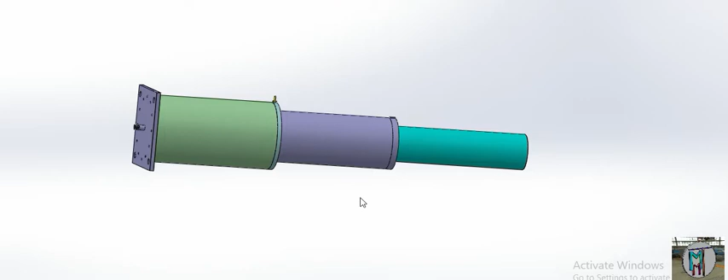So what is the working of that? Suppose we can close this now. This is the cylinder, suppose this is 500 mm, and we want the stroke of this cylinder. We have to move our part around 900 mm.

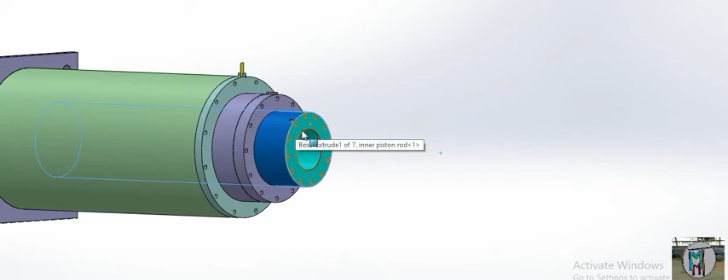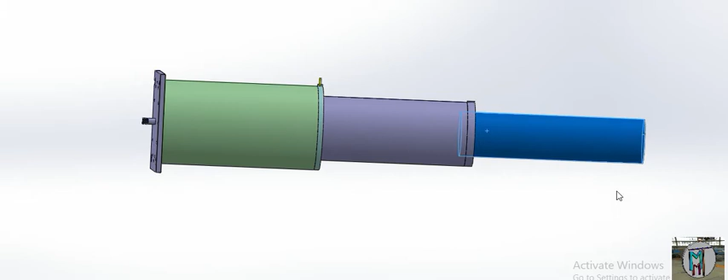So that time we have to fix our parts here in this portion. You know very well about this: this is the A point and this is the B point. When pressure will come from this point, the shaft will move forward side, it will go forward, and again it will go forward. How will it work? We will tell you here.

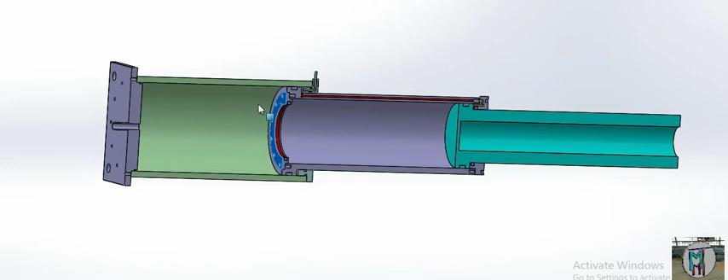This is the section view of our cylinder, the same cylinder. Forget this one first, we have to check this. Pressure will come here and pressurize this portion of your piston. It will be moved forward and backward side. Pressure will enter here and drain through this. This is the B point.

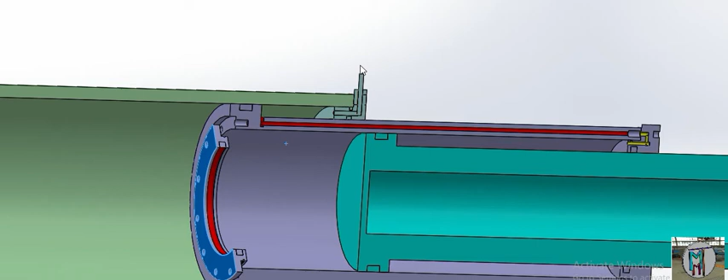So pressure will come here when oil is here. New oil will enter and the old oil in our cylinder will go through this to our tank, through the valve and to the tank. So that is the function of this, and we have to move this now.

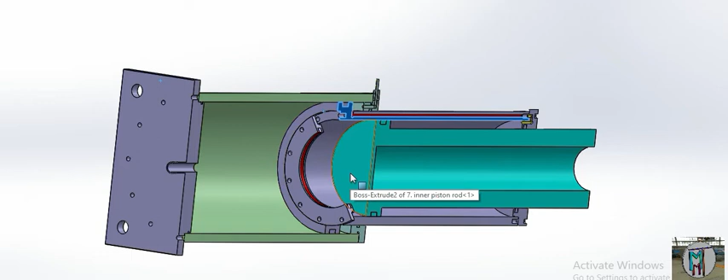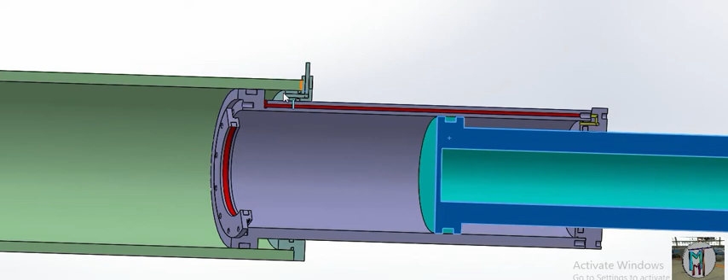So you can see the one hole here, and when pressure comes, this portion will be pressurized and also this portion will be pressurized. So we pressurize this, it will move forward. The oil we have fixed here, you can see the point, and through the pipe of this cylinder body it will go through this one also. So pressure will come here.

So this will go forward and also this will go forward. This oil goes through this, and what oil is here will go through this point, and also go here.

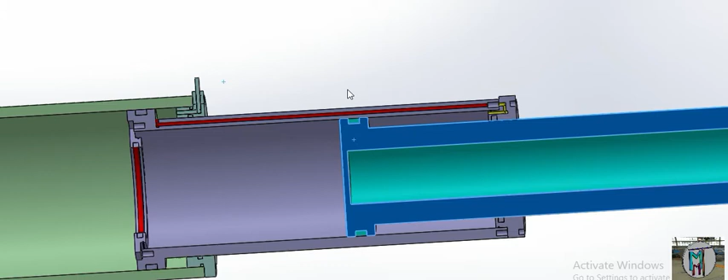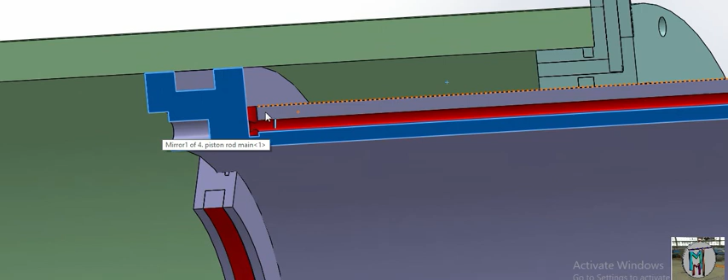And when we want to close this cylinder, pressure will enter. Suppose this is the B point, so pressure enters through this, pressurizing this portion here. When pressure comes, it will go here, and you can see one hole inside here, this red point I colored. Pressure enters through this, comes here also, and releasing through this same way, it will go inside, also due to this pressure. So when it goes, your system will be closed, and the part you want to move will be moved.

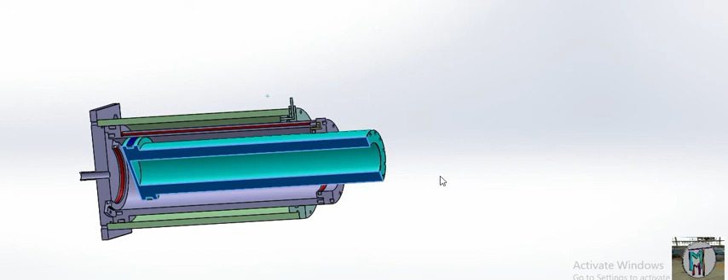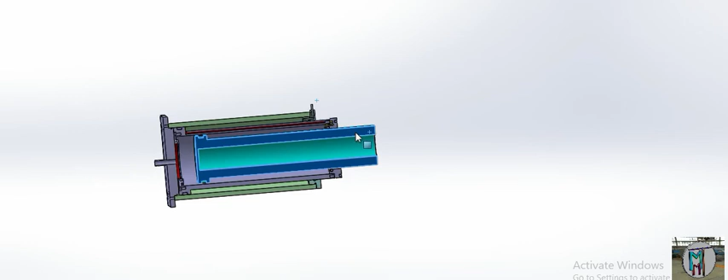Suppose we use this cylinder in our machine only, where we have little bit of space. If we compare to a crane, you can see the control of this length also. If you want to move this part, it will be moved. How will it be moved?

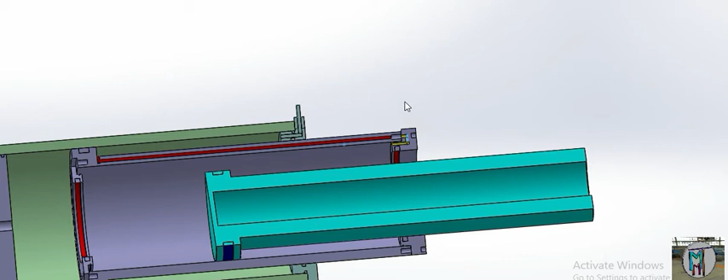Suppose we have taken this through this hole, so no need now, we will take directly from here. We will close this, we will take one outlet from here. Suppose now we have to fix two valves, one valve for this and one valve for this. When we want to move this only, not this, this will be closed. This valve will be closed here, and when we want to move this part, we can close this valve so pressure will not release from here.

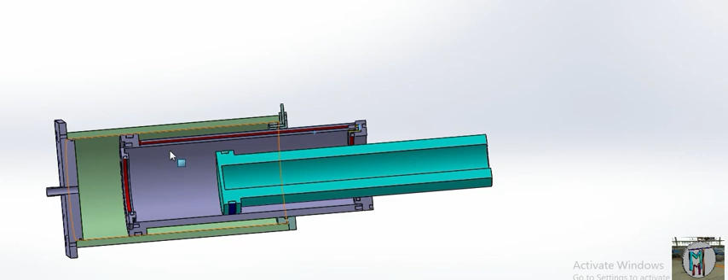Suppose we will set the position now first, both are closed now. Now we want to move only this inner part, not this, so we have to close this valve and give the pressure. Because this is closed, oil will not drain from this. So only this valve here will be open now, and it will move because pressure comes here and goes through here from this port.

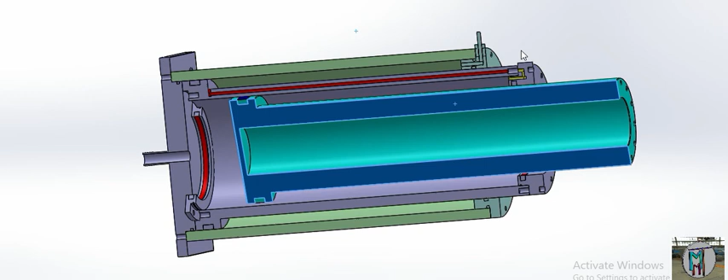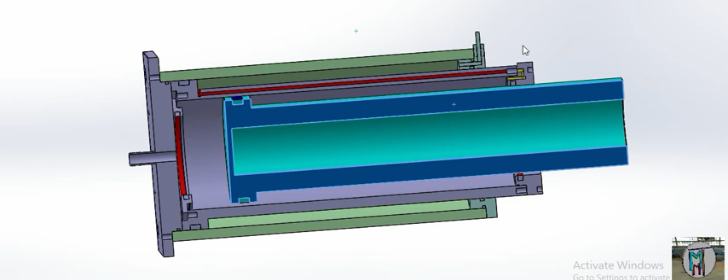I am talking about the crane, not this cylinder. I am telling you the working of the crane is the same working as our machine also. Only the housing changes, the front housing of our piston. If we use through this pipe, both pistons will work at the same time. If we want to control this, operate one sometimes and the other sometimes, we have to separate both portions of this. So simple connections are there.